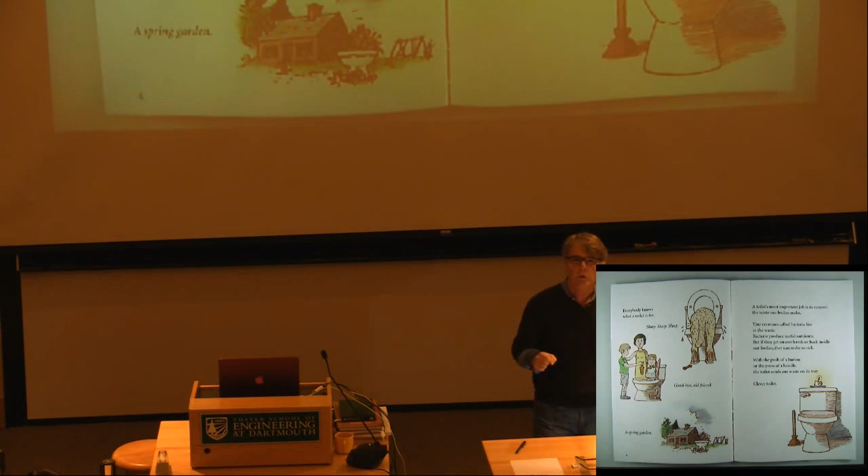It's an object so familiar that we completely take it for granted unless it stops working. And it's amazing how quickly we stop taking things for granted when they stop working. We're just used to it. We don't look at them. We don't see them. In the middle of the night, we hardly even touch them. But we know how to find it. We know how to use it. We know how to be done with it.

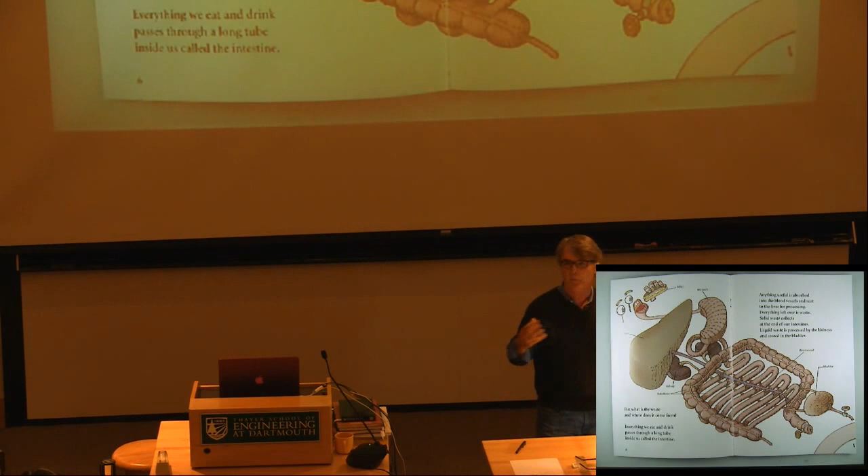Familiarity, in that sense, really does breed a kind of disdain for looking, for taking note of the things around us. We become so familiar, we stop asking questions. The best thing about drawing is it forces you to ask questions again about even the most familiar thing, which is why I mentioned the apple.

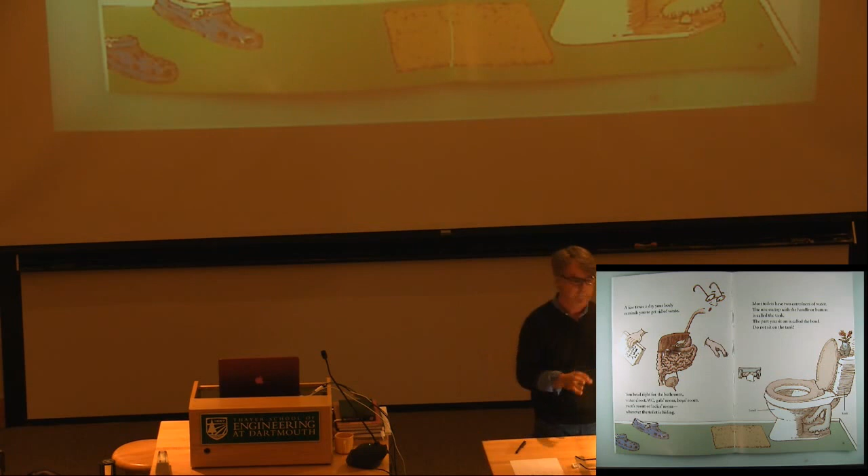So I take you through. I decided that I would introduce the toilet and the toilet system as part of a larger system that began with a human system with which it interconnects. Toilets are relatively useless without us. And there are those fundamental issues and problems like no paper that confront everyone. But those are the little clues that remind us, this is very familiar, this is my world. And into the tank.

Now, you may think for a 6-year-old or a 7-year-old kid who's not much of a reader, this is a little bit of a stretch. I hope it is. I hope it is a little bit of a stretch.

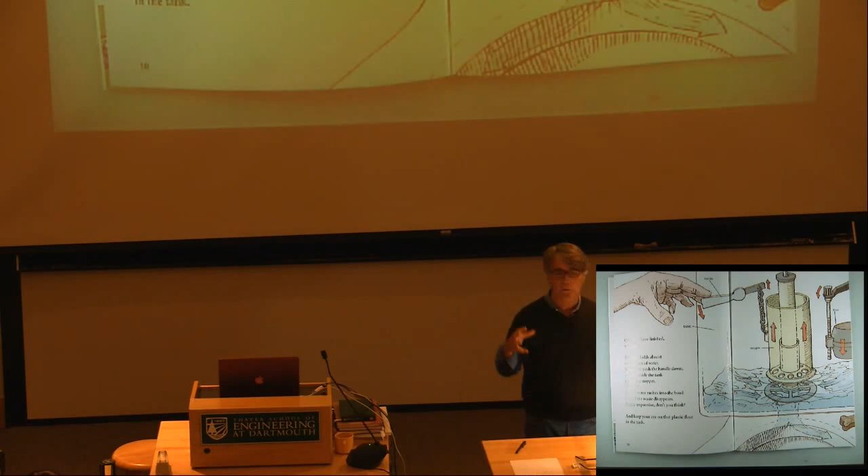So I'm scrambling around on my hands and knees around one of our toilets, trying to watch the flush action, see exactly how the water disappears, and where it's coming out in force and where it's just kind of leaking out. And so that's what this is all about.

I mean, a character is only a way of engaging the younger audience. The dog with the missing dog biscuit. A little bit of a...

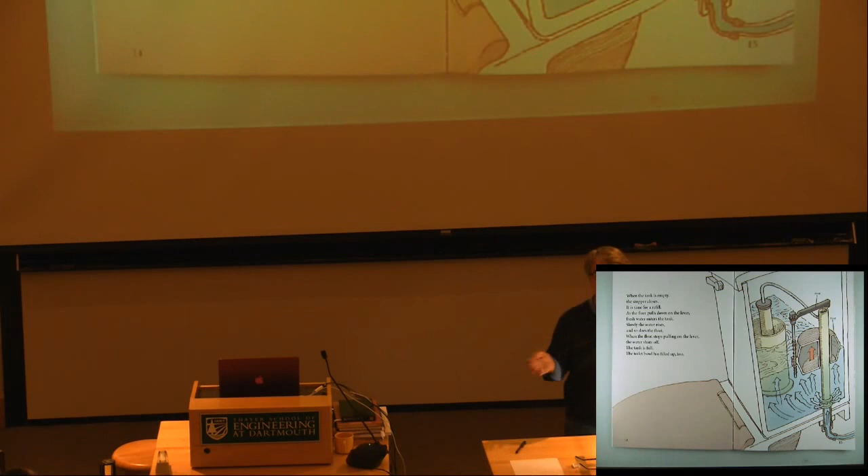Anyway, if you need to know, if you have problems with your toilet tank and you're not quite sure what to do with it, you probably can all figure it out. But if you weren't able to figure it out, you just get this little reader. Might be a little embarrassing at first, but get it and you will know exactly what's supposed to happen.

You will know what happens after the toilet with the septic system. If you happen to live in a place with a septic system, you will understand and have a little bit of appreciation for the biochemistry going on here, the bacteria at work, and their job is, of course, crucial to making this whole thing work. It's what gives us green grass.

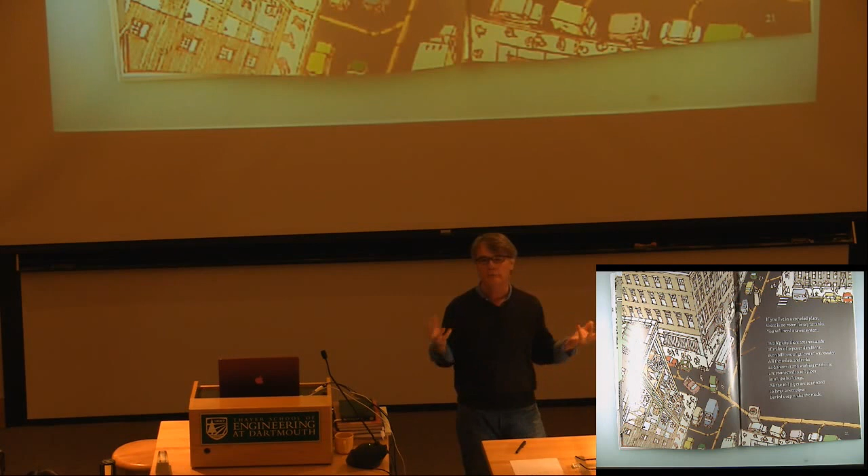If you live in a metropolis like Hanover, for instance, you might need a larger system. And I did spend a few days in August of 2 years ago now. It was hot as hell. It was like August afternoons at the waste treatment facility in Hanover.

I don't recommend it unless you absolutely have to, but it was terrific because they actually let me hang around, which was an odd request, I suppose, to begin with. But they let me hang around there with my sketch pad and so on.

And I finally figured out what all those different shaped tanks do. I mean, I've driven past waste treatment facilities for years. I've flown over them. But I never really understood what the round tanks, the square tanks, the covered tanks do.

So now, to help this young reader read, you can actually learn about aeration tanks and digesters. I mean, digesters, what a fantastic life for bacteria, to be flung against the walls endlessly in this stream of sewage. It's a spa for very tiny creatures, in a way. So anyway, that's what this is all about. That's how I introduce myself.

That's the latest. But now I will jump to a range of examples that I hope you will find useful.

I don't have a graduate degree. I just have this Encyclopedia of Science that I got when I was 10. And it's actually done reasonably well for me. It has information about everything I could ever want to know. At least that was the way it was sold.

Empire State Building. SS United States, fastest steamship in the world. Won the Blue Riband, and then it got beaten out by airplanes. And so it remains in Philadelphia, tied up to a dock. It is the subject, in part, of my latest effort, and I will take you through a little bit of that, but I want to really try to emphasize the decisions I made about the drawings I did, or am doing. Nothing's finished yet.

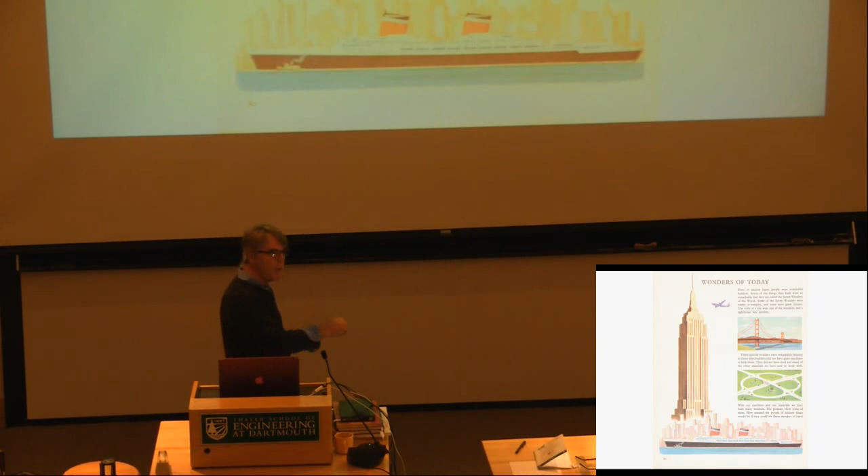I haven't made a single piece of finished art for this book, which is due in about 2.5 months. So I'm in big trouble, but I do know that at least the material is making sense to me, partly because of the drawing process.

And we were heading west to the Empire State Building. The only thing I knew about the United States when my mother said we were going to America was the Empire State Building and cowboys and Indians, but that didn't really count. The Empire State Building is the thing that got my imagination.

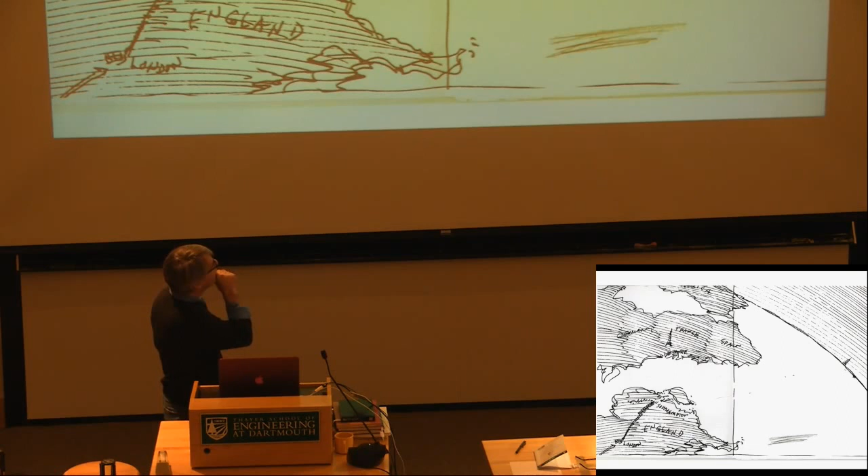So I did want to give you a sense of the relationship between the US and England, which is shown here upside down because I want you to move across the drawing from left to right, which is the logical way to move for many of us, not all of us, and end up in the West there.

Okay, so last night on the ship, this is a 4-day journey. The last night of this journey is something called gala night. They have this fancy menu with food things you can't pronounce, at least not if you're from Lancashire and you're 10. And so there we are, having the times of our lives.

We pull into New York, finally, after this. Now, I had no idea that this was such a fantastic ship, that it was really a work of art in terms of speed, carrying 2,000, more like 3,000 people, across the Atlantic at 34 knots or something like that, and then finally pulling up the Hudson into Dock 86, Pier 86.

And there's the Empire State Building to greet us. But wait a minute, I'm 10 years old. I know what the Empire State Building looks like. I know how big it is. It's this big. It's not this big. This is pathetic. What a disappointment.

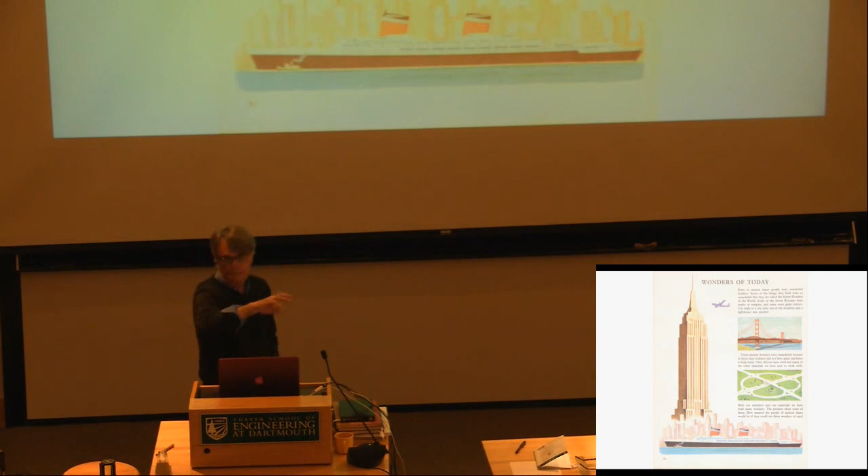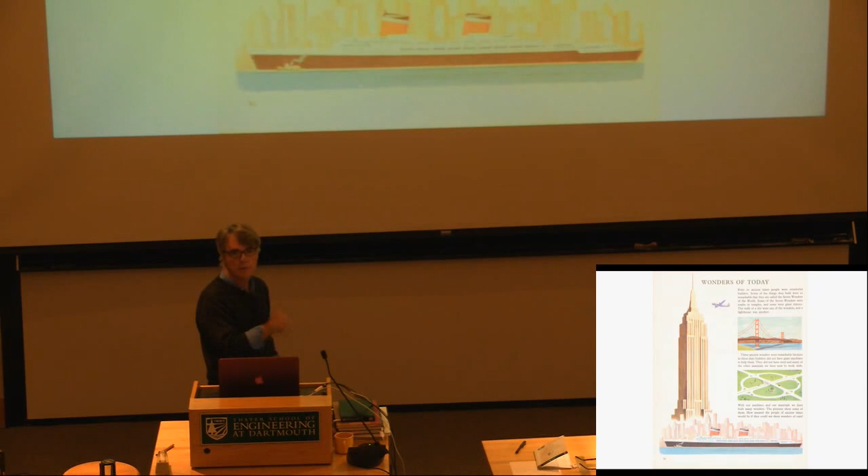It was the first time in my life I felt actually cheated. And the irony is, I was cheated by an illustrator. But he got away with it. On legal grounds, he was okay, because you'll notice that the building doesn't actually touch the skyline. It floats above it with a sort of foggy mist, which means he is off the hook for misleading young readers who pay attention to the illustrations, even if they don't actually read the words, which was me.

So what kind of information do I need to ultimately be able to tell my story? And it's what you would expect. It's plans, cross-sections, all this kind of stuff that basically means nothing to the average reader. And if I attempted to use this as the material to present this extraordinary creation, I wouldn't last long.

This is a bulkhead, a watertight bulkhead. This is basically one of 20 walls built from side to side, from the bottom of the ship up to about a deck, something like that, halfway up the height of the hull. Heavily reinforced. It's like an ice cube tray, except the containers actually really touch the bottom, and there's nothing seeping through on either side.

The whole point of this is, obviously, if you damage part of the hull, the area between two of these bulkheads might fill up with water to a certain height, but it will not destabilize the ship to the point where it starts to sink unevenly.

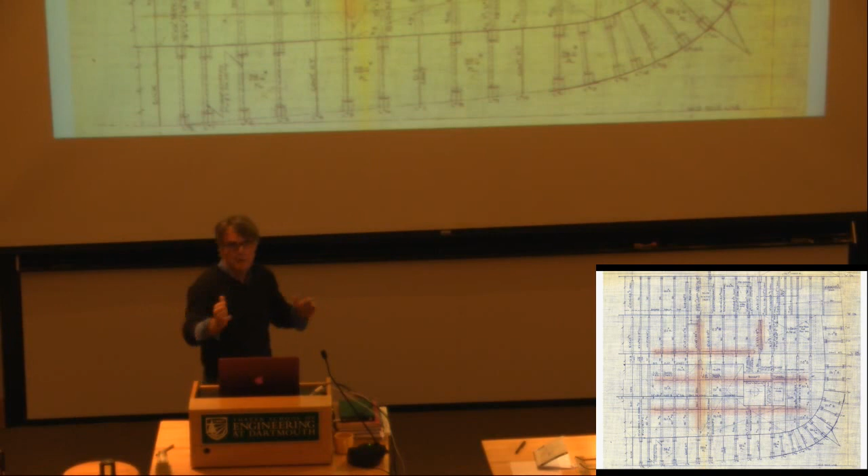So this is it. This is where it is these days, and you can see that it has actually seen better times. There's a group called the Conservancy for the United States that's trying to save the ship and come up with ways of repurposing it, not as a ship. It won't sail again. But it's hard to come up with ideas for something 1,000 feet long and 175 feet high that's meant to float in water, 100 feet wide due to the limitations of the Panama Canal.

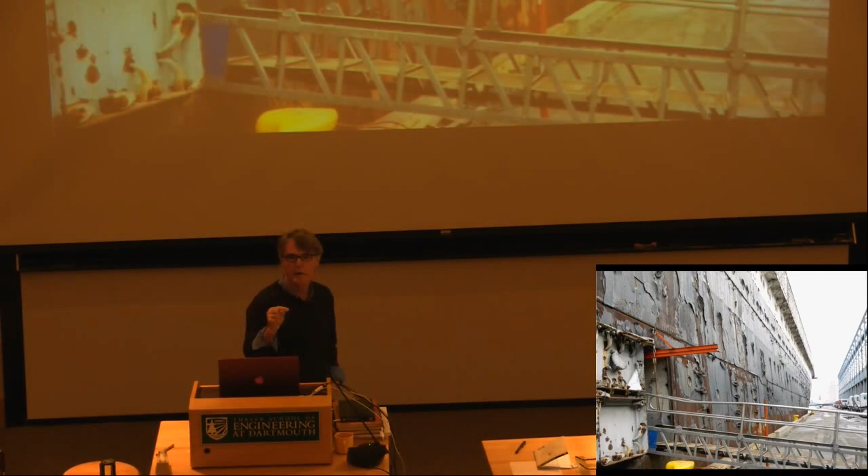That was a requirement pushed on the creation of the ship in the beginning, because it was designed not only as a passenger liner, but just in case as a troop carrier across the Pacific, which is where the trouble seemed to be brewing.

Anyway, just a couple of images from the 2 or 3 trips I've made now to the ship. Up the radar mast, the whole upper section from the main deck, the promenade deck, where the hull stops, basically.

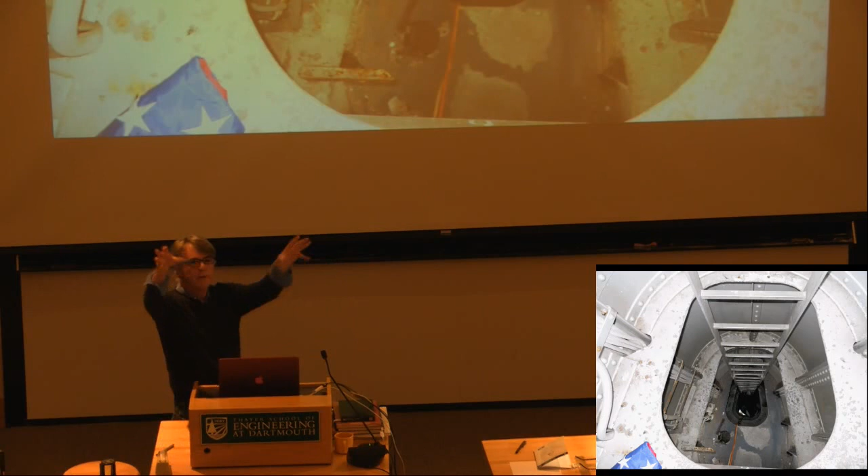Everything above that is built of aluminum, so it has a relatively small weight. It doesn't have much strength compared to the steel hull, but it significantly changes the way this ship works in the water. That's something I need to get across. This is the surface of the deck now - that's rust. This is the funnel.

This is inside one of those two funnels, and you can see it's just basically this vast sculptural form, a very small portion of which the uptakes from the boiler rooms pass through to get rid of their soot and stuff like that. This is a little hard to read, this little drawing up there at the moment, but this is more or less what it looks like inside.

It's pitch black - there were no lights at the moment, no electricity in the ship. So what made it tricky was trying to find your way around. What I found was the digital camera, in my case, was fantastic because it would illuminate the whole space for a split second, and only when you got away from the ship and had a chance to really look at these images did you know what you'd seen.

The idea of drawing those photographs is really important for me, and I'll give you some examples of that. Photographs record a lot of stuff, but they don't actually help you see it. Unfortunately, what is often the case is I get back to the studio with these photographs, and I have so many questions about what's in the photographs that I can't answer. I'm not going back there.

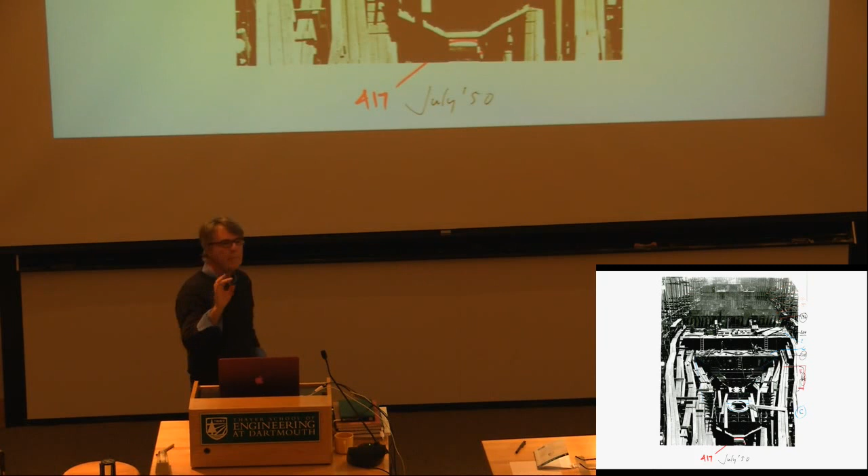So drawing from photographs is really key, and figuring out how to do it - I don't just mean copying the photograph, I mean interrogating the photograph, and finding other information that can help you answer those questions as you start to draw it. The thing is, you won't ask the questions unless you begin to really investigate the photograph, and one great way of doing that is through drawing.

These are photographs taken at the time, 1950-51, of the construction of the ship, and these are often, with the perspective and the distortion, really difficult to read. But I'm trying to get a sense of the depth here and all that sort of stuff.

One of the things that I will do with a photograph like this is draw it, but from a different angle - turn the whole thing slightly, so I have to draw it from the side. As soon as I change the point of view in making a drawing, I can approach the subject matter in a different way because I start asking questions about what is there, what's behind that, what is that tube connected to. No one angle is going to give me all that information, but the act of drawing it, of transferring it, through this process of inquisition, will encourage me to fill in the missing pieces.

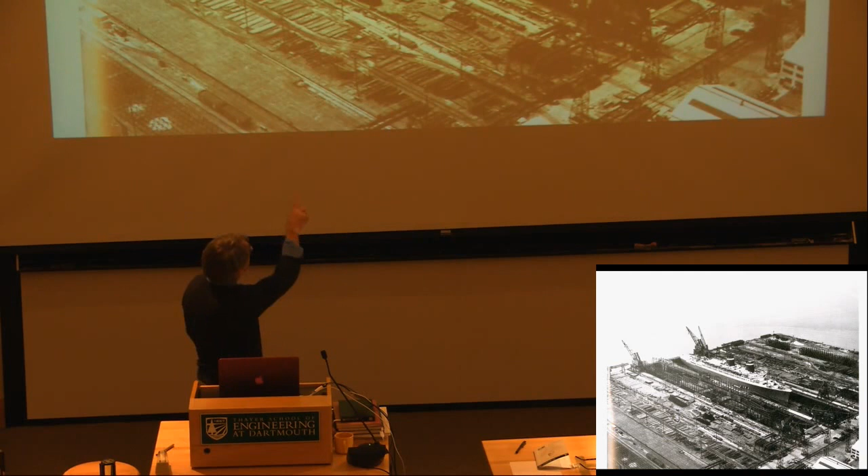There is the sister ship, the America. This big thing in the foreground, that's the dry dock in which the SS United States is being built, and it will fill the dry dock something like this.

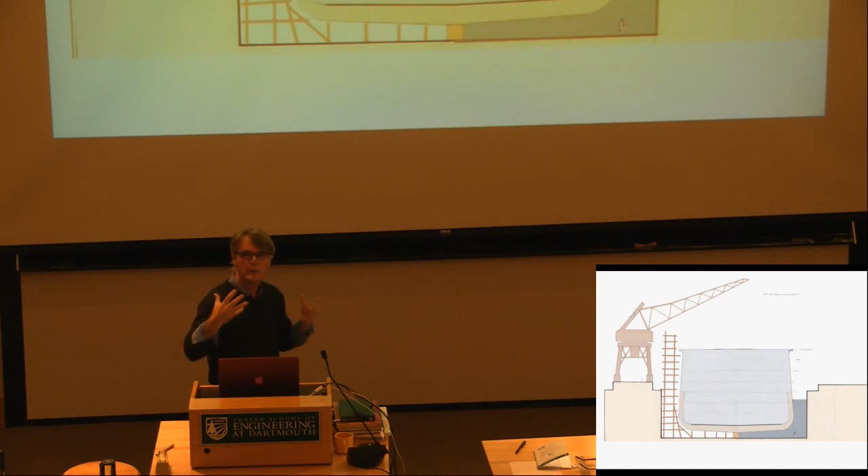I mean, it doesn't look like a particularly handsome form, but when you see this thing in three dimensions and realize how the curves have been perfected, you realize why it could travel at the speed it could, given the weight reduction thanks to the aluminum and the incredibly powerful engines that ran this thing - basically destroyer-powered, battleship-powered engines meant to go fast.

The story begins, in a way, in 1894, when we get to the end of an evolution of steamships. William Francis Gibbs, who designed the SS United States, commits himself after watching the SS St. Louis launched. He's a big fan of Brunel - who isn't? Who in engineering is not a big fan of Brunel? I mean, an extraordinary guy who - I think one of the things I admire most about Brunel is that he was always willing to learn from somebody else.

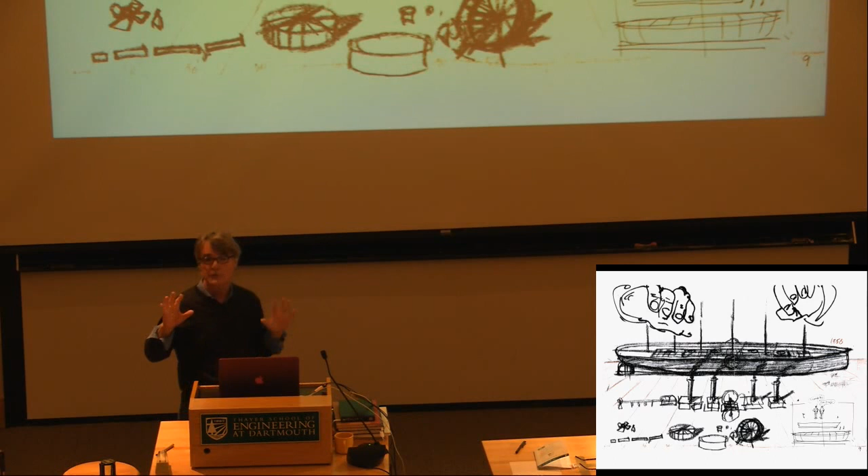Gibbs's ship, which he designs when he's about 22, 23, is going to be, in his mind, the fastest, longest ship in the world. This is his dream. It's made possible in part because of work done in the early 19th century to improve steam engines, which go back to 1700.

Here's a little drawing, a set of sketches, basically. They're not pretty, but there's a thinking process I hope you recognize, jumping from one thing to another. In the upper left-hand corner you have the old steam engine, the kind of thing used to work a pump to drain water from mines. You've got a chimney from the boiler, from the furnace, the boiler in purple on top of the furnace, and the piston on the right-hand side, which is going to pull a lever that works a pump and drains the mine.

Well, you can try to put something like that on wheels if you have this idea for something a little more mobile. This is not a steam engine that's meant to go anywhere—it's three stories tall. But the arrangement of those very pieces, the reduction of the things that provide the work necessary to operate something, is unchanged. I simply bent the chimney into that U-shaped fold, ran it through a boiler of water. So there's a firebox in there creating heat, and that heat is moved through that big folded chimney and out the top. Now you've got something small enough to stick on wheels.

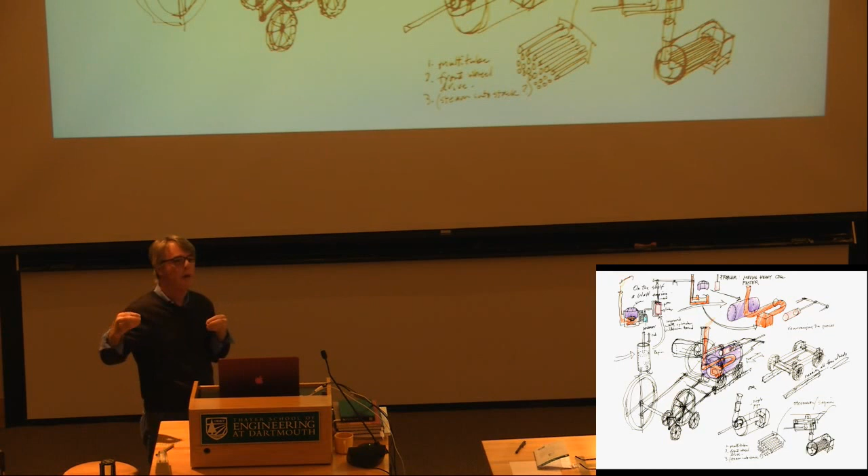Eventually you take out that U-shaped thing leading to the chimney and replace it with lots of small pipes, so a much larger surface area is formed between the heat traveling inside the pipes and the water around them. So you get a much more efficient use of your fuel.

So once you've got pistons working with steam, you can connect them with cranks to a drive shaft, which will lead to a propeller, or one that crosses the ship leading to two paddle wheels if you're still using paddle wheels.

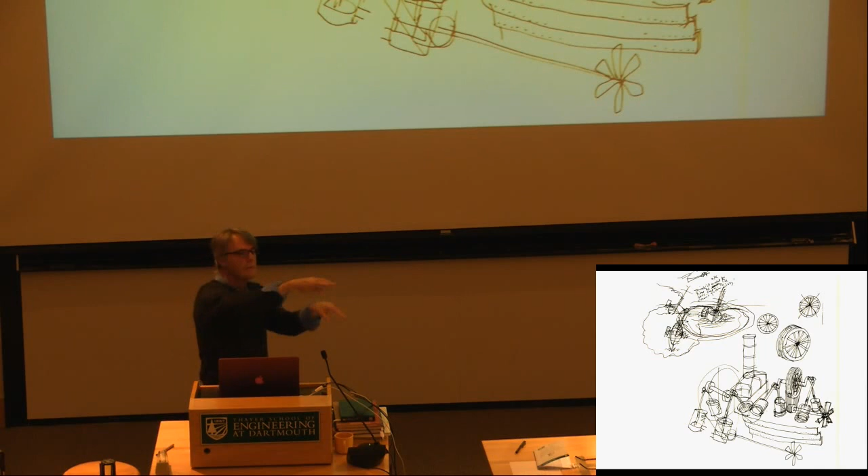The problem with paddle wheels, of course, is that as the ship moves through the sea, it's not necessarily moving steadily or in a horizontal way. The paddle wheels tend to lift out as the ship rocks, so you're not getting a very even distribution.

Now, Gibbs, like Brunel, learned from other people, and he had a chance to work on this enormous German ship that was seized during World War I, used as a troop ship, and then after the war was converted back into a luxury liner—but now an American luxury liner, as opposed to the German luxury liner it had begun its life as.

He's got 30 years of learning from all these extraordinary opportunities, but his dream remains to build the fastest, longest steamship in the world. He works for the Navy, he and his brother, and they're responsible for overseeing and creating something like 70% of the Navy, of naval and merchant vessels, during the war. So they become very successful.

William Francis Gibbs becomes the preeminent American naval architect who never studied it—he actually went to Columbia to learn real estate law. You may not see the relationship between those things; I certainly don't. But he did it because he promised his father. He said, 'I'll do it for a year,' hated it, and went back to designing his big ship. He had the extraordinary success of being able to take advantage of every opportunity that came his way.

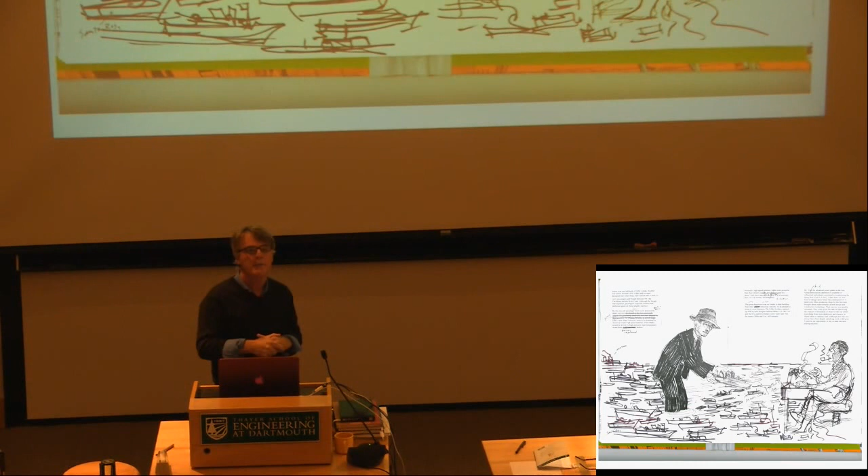What kind of a drawing do you make to suggest this? Well, I don't know whether he's looking into a tank filled with all his creations, as if it were this extraordinary bathtub experience, or whether it's a test tank in which the hulls were literally tested to improve their workings. His brother Frederick was primarily concerned with the adding machine, keeping track of expenses.

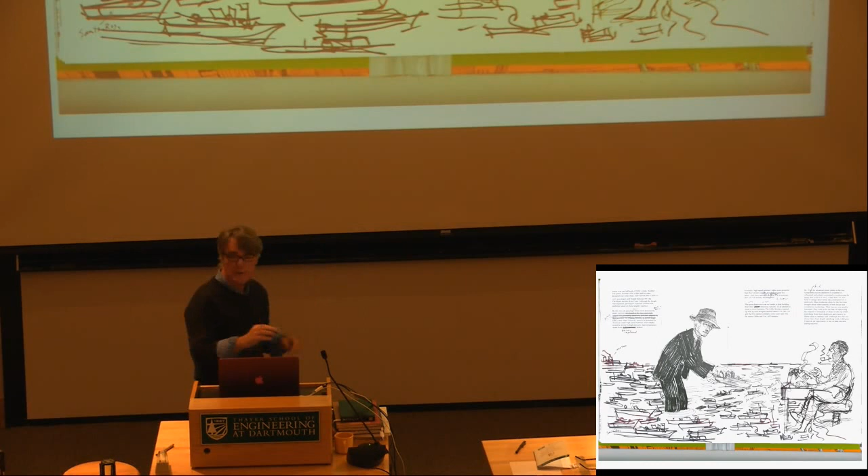And the money that came in was obviously considerable. He is very successful even then, when the Normandie comes into New York. This is a page of sketches meant to get across the idea of this fantastic, streamlined, spectacular ship, which also won the Blue Riband for a couple of years, and had huge, gigantic public spaces—like the biggest hotels and so on—but on board this ship.

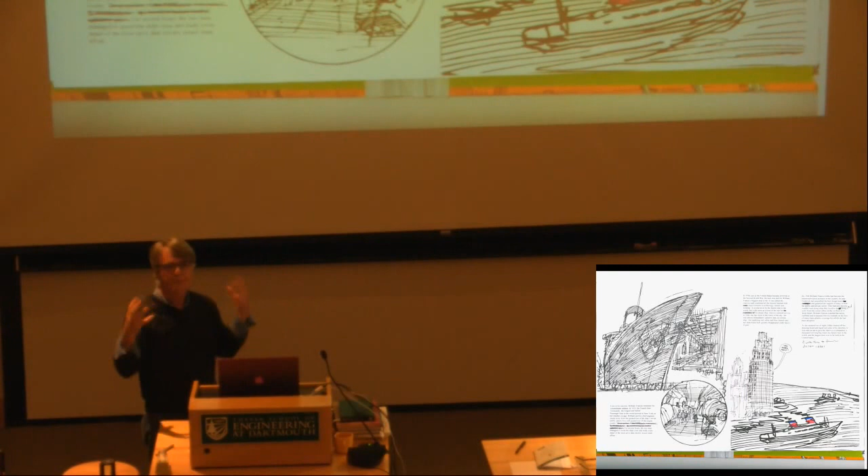So it was that kind of experience. Meanwhile, he and his cohort, another engineer from the firm, snuck down into the engine room, which was all electric motors that made the Normandie a unique ship.

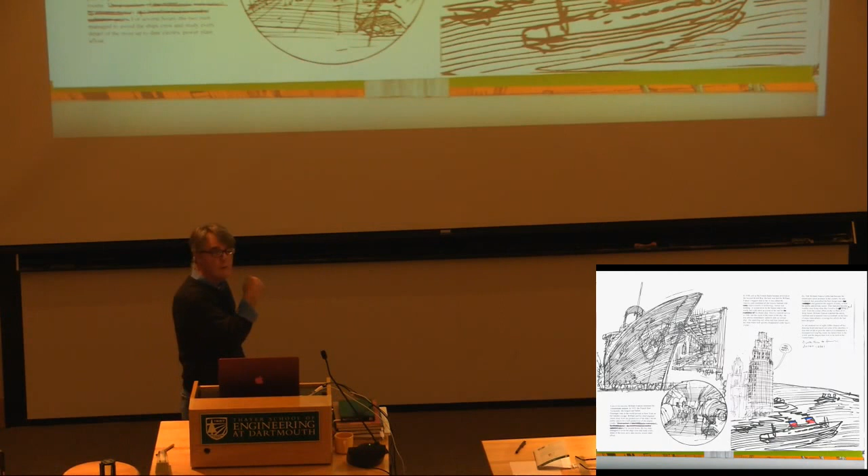I'm playing with possibilities. This is the Queen Mary. I'm not sure what ships to show here yet, but I plunk these things down. The sketches are rough. They're recognizable because I've drawn them enough times.

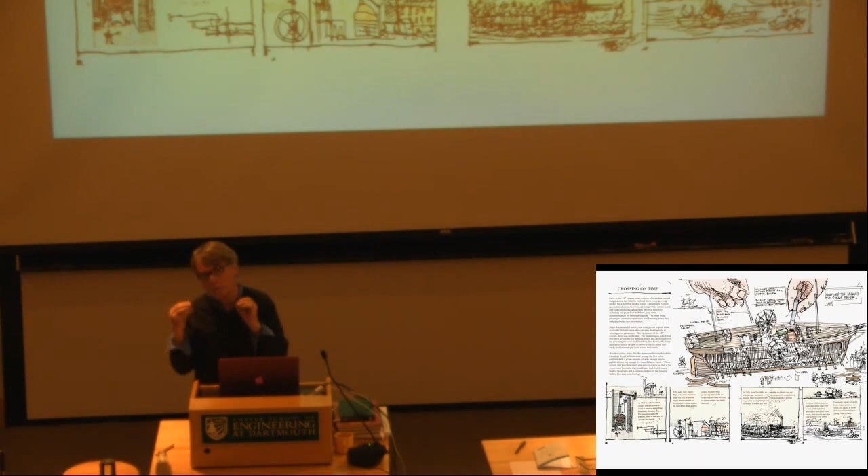The one thing you will find about drawing that I find useful personally is eventually you no longer need the subject matter in front of you. You don't need references. You draw things so often that you can continue to draw without any backup. That's when you really start to think about the elements. You're not being distracted by the look of something. You're being concerned more with what it does and what it does in relation to other things. In this case, it's just shapes related to shapes and so on.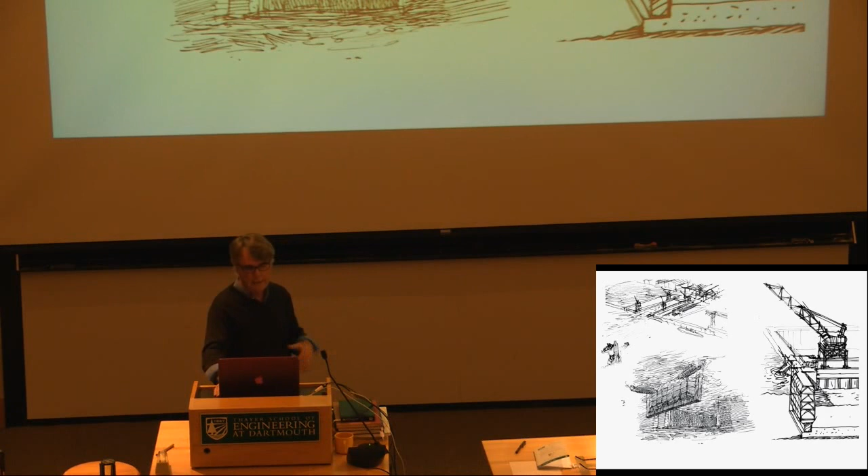The first thing you need to do if you're going to build a United States is get a dry dock ready, which means you have to empty it. You're basically floating this big wall over to the front of this bathtub, which only has three sides. You push the wall into place, fill it with water so that it drops, and seals the end of the bathtub, especially when you take the water out. When you suck it dry, the river water on the outside of the wall is pushing it against the end of the bathtub, which creates a really tight seal. So you end up with this space, which then you can lay the scaffolding in.

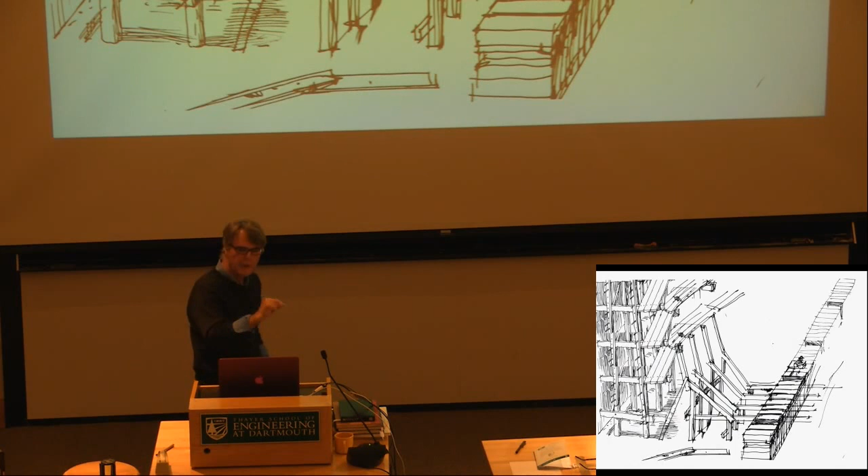Again, these are rough sketches. They've been drawn many, many times. I don't know whether any of these will make it into the finished book, but one of my favorite photographs is this one.

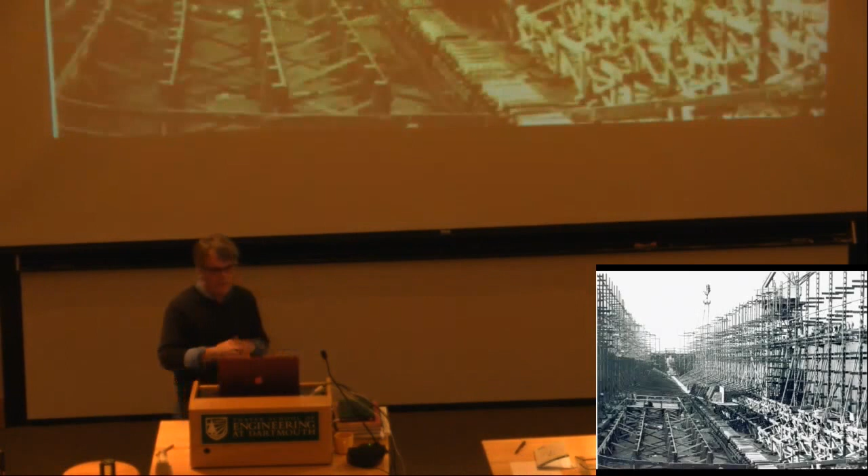Gibbs was paranoid about fire in his ships, so no wood. He tried to convince Steinway to build aluminum pianos for the ballroom and the first-class dining room and so forth. Steinway refused, but what he did do was fireproof the wood and then set a piano on fire to demonstrate for Gibbs that it wasn't going to go up in flames and create a serious problem.

The irony is, everything around the ship during its construction is made of wood, with the exception of the cranes. That incredible scaffolding, the cradles that support the hull as it's being constructed, the block down the center that supports the keel. The keel itself begins as this sub-assembly.

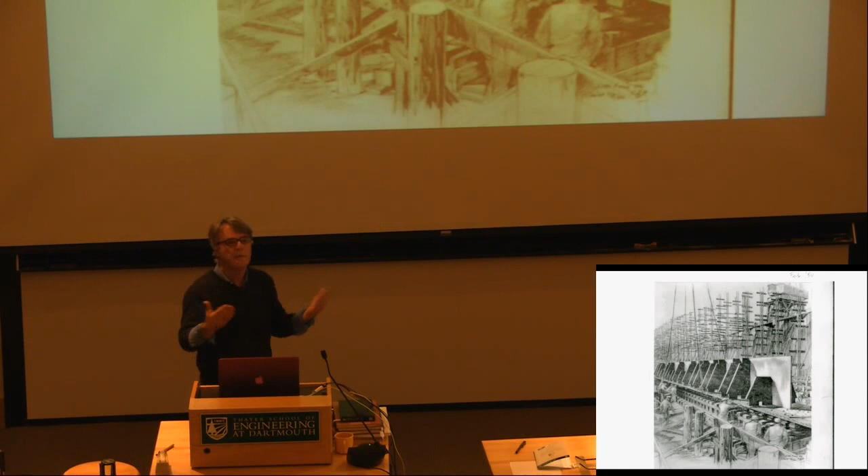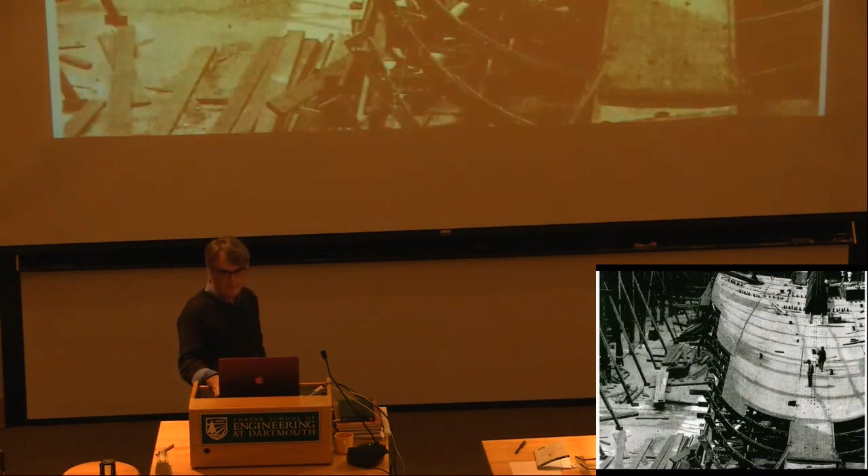The other thing about the ship is that it was produced basically in lots and lots of pre-assembled pieces, so it could be put together fairly quickly. It's ironic to think of this beautifully streamlined form being made primarily out of flat pieces of steel, maybe an inch thick, maybe a little more, a little less. Just cut into shapes and stuck together as you might make a model with a glue gun and foam core. The shapes you can create are really quite beautiful, but the structure inside it is very basic. Outer hull at the base.

And so now, choosing points of view. When you make a drawing and you're trying to explain something to someone else, I'm synthesizing the information I hope I have learned by creating the double hull shape, the big U shape, so we have an inner shell and an outer shell. I'm also trying to figure out how to get you involved in this, how to make you part of the process, how to let you be a worker for a few pages, as if you were there with your welding torch or your riveting equipment. Both were being used. Watching this thing grow around you, it's the point of view, the use of perspective. These are all important things.

Sometimes you need to get away and use something perhaps a little more conventional and, frankly, less interesting - a more isometric view, as you see here. But these, you begin to see now the bulkheads, these parallel walls. They're about 40 feet apart, running from one end to the other. And this is the biggest safety feature.

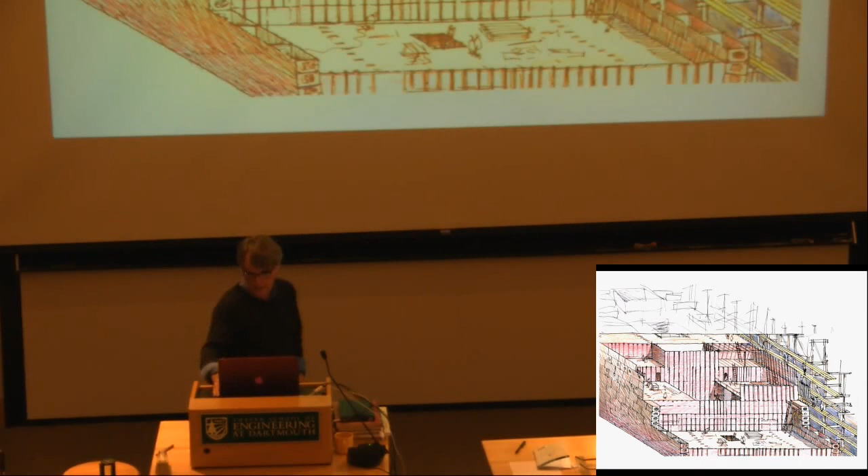First class passengers never had to go through a doorway in the bulkhead, which means wherever their decks and cabins started, the bulkheads ended. But they were far enough up and away from the water that it wouldn't have been a serious problem unless something really catastrophic happened. We were not first-class passengers, just in case you're wondering.

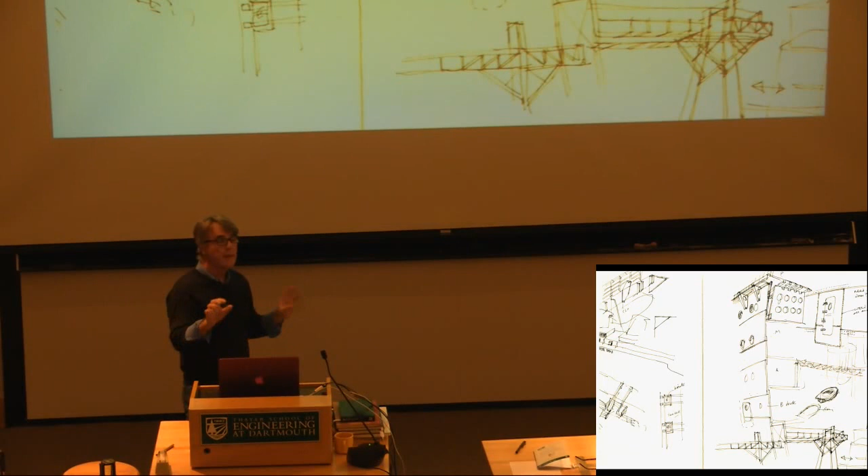Planks, the planking on the exterior of the ship, these are planks that are sort of 8 feet high, 12 to 20 feet long, an inch thick steel. In the center of the ship they are riveted, and as you get towards the end of the ship they're welded, so the surface becomes smoother and can cut through the water with a little less resistance.

The back of the ship, this is like trying to understand one of these photographs where the perspective is a little disconcerting, tricky to figure out. That's the keel at the bottom beginning to rise up now towards the rudder. You've got those tunnels on the sides that will carry the propeller shafts. The two outer ones carry those shafts 400 feet from the main engine room. You get this extraordinarily beautiful sculptural projection on the side of the hull at the back.

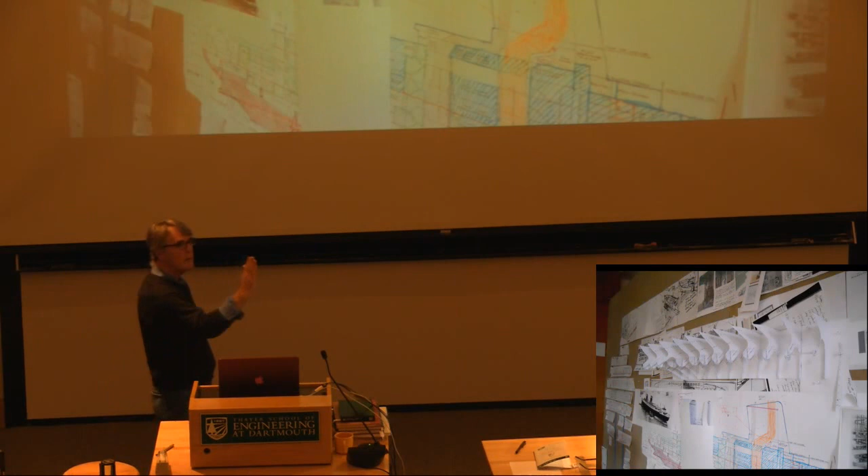This is how it's conveyed in official language, which is almost incomprehensible to any but the engineers and builders working on the project. So what I did was take this plan, print it in black and white, cut each of those silhouettes out, and then stick them together on a cross-section of the hull at the back. You begin to see in model form how you translate from a drawing.

I think building models is really important. Even the most basic, simple, taped together little things can really help you bridge that gap from two-dimensional exploration, that questioning exercise, into something three-dimensional. Again, it's not about being pretty. You can only go so far in your drawing in understanding what's actually going on three-dimensionally. At some point you need to mess with the real thing, and the more quickly you can make that leap from drawing to three-dimensional model, the better.

You're building this body of information, and these two means of exploring the problem help you figure out whether or not you're asking the right questions. So whichever of those things you find most useful, you go for it. This is what it looks like, and the actual finished thing looks like this.

Now, there are a number of videos available of aspects of the ship under construction, and you see something like this, which might be a little hard, impossible actually, not hard, for you to read. This one's equally difficult, but this is the end, the stern tube. This is the last piece of those 4 shafts that come out where you break through the hull in order to have propellers.

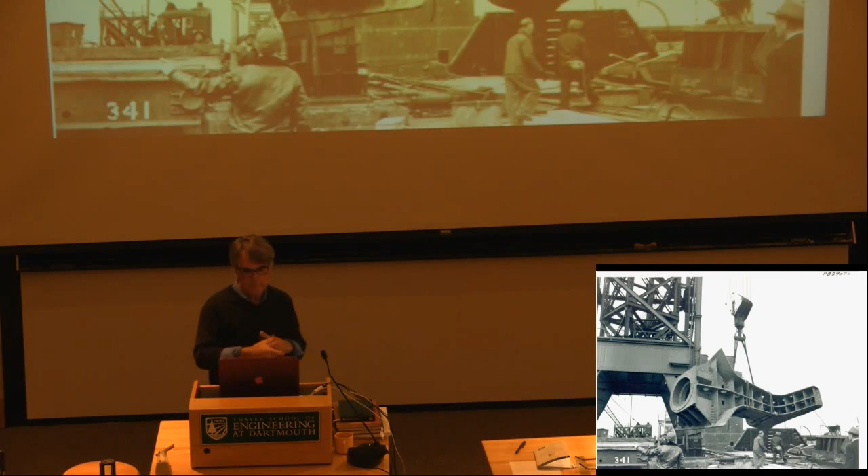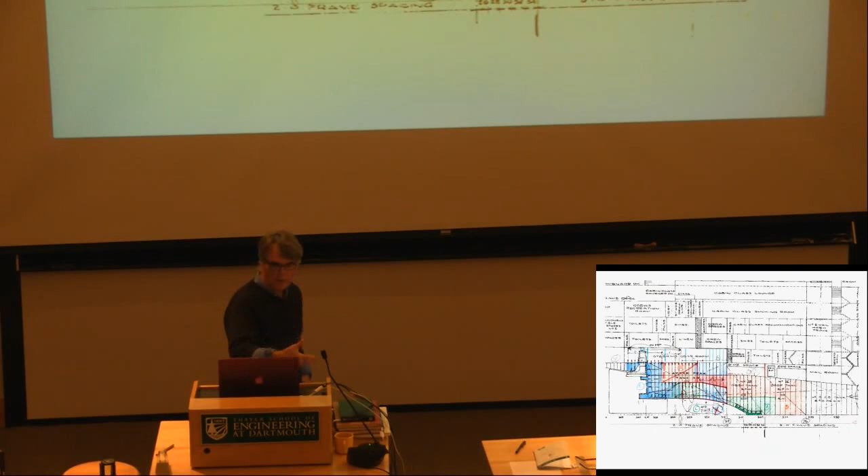Here's a big casting, welded together in a number of pieces. I'm sure nobody's going to cast anything quite like this, but this is the piece that sits at the end of the keel, and it supports the weight of the rudder, basically. You can see in cross-section, that dark blue area is that cast piece I just showed you.

In this photograph, we go back, and you can see the rudder in place now. You can see the relationship between... you can see how complicated the back of this hull is, but it has to be. This is the part that's doing the work. The other end is what's pushing through the water.

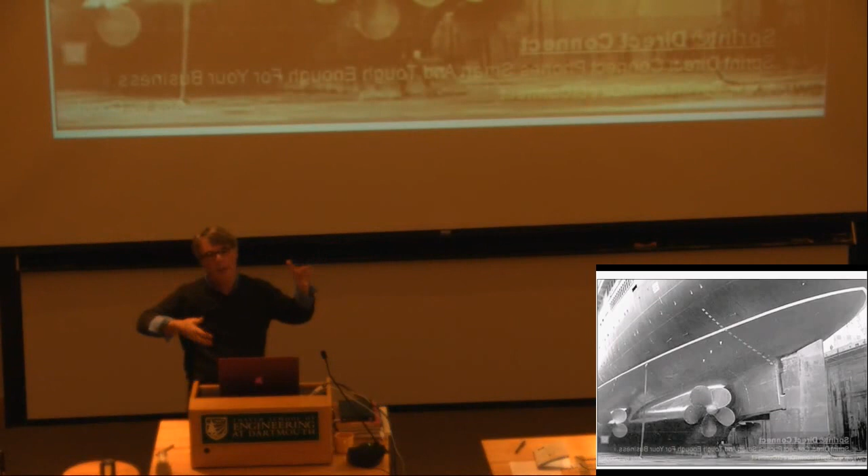Now, I said they built this thing in a dry dock. They almost built it in a dry dock. The dry dock was, I don't know, maybe 40 feet too short for the ship. But fortunately, where the ship projects, both at the bow and the stern, it was high enough up that it could stick out over the ends of the bathtub.

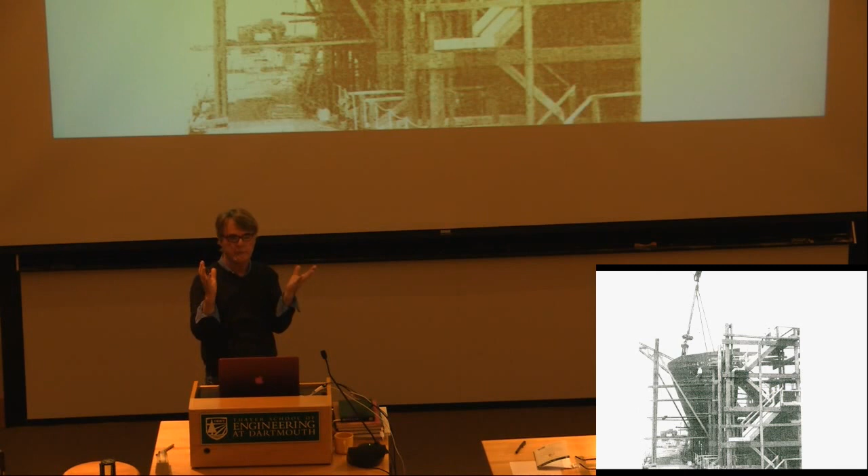So this is an entirely pre-assembled stern shape. This is the last piece of the ship at the stern end to be put into place. It was built next to the ship and then lifted into place. At some point you have to start getting the equipment downstairs, and you want to do that before you've covered much of the area with decking.

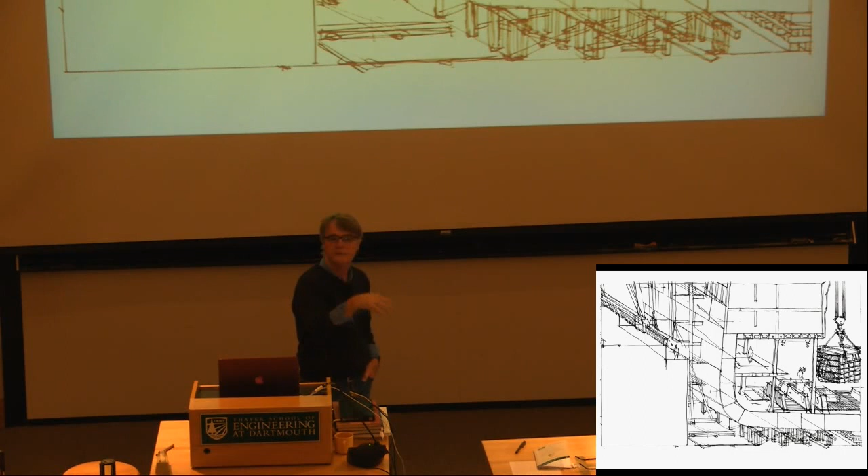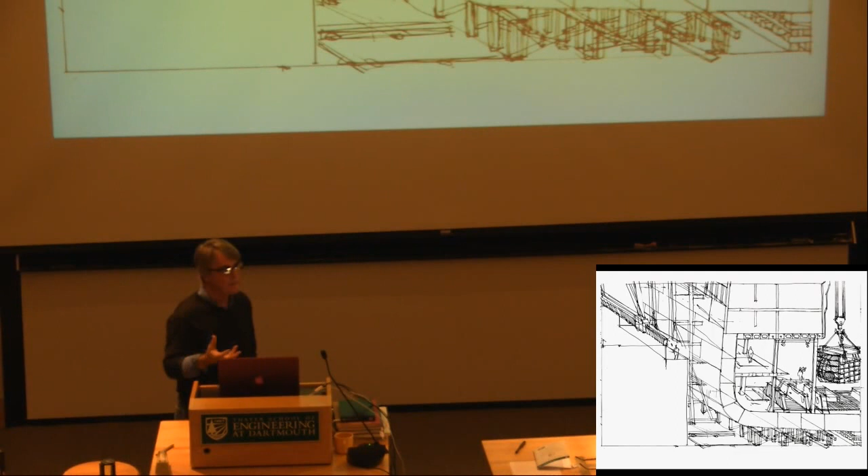And I need to find a way of suggesting that process just to remind you that you could end up with one of those horrible experiences where you design something for a place and you only realize after the fact that it's 3 feet too large or something, and you can't get it in or out. That's tricky with boilers and turbines and reduction gear assemblies, because those things are heavy.

Here are 2 of the boilers. There are 8 altogether, 4 for the outer set of propellers and 4 for the inner set of propellers.

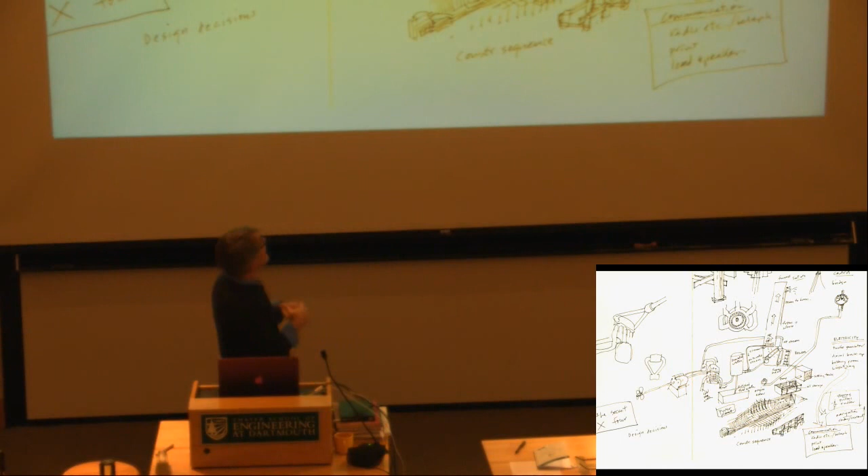Now, the system. This is another reason why drawing is so helpful and can happen quickly. You can't really tell what's going on, so I threw some color in. You can see the boiler in the center, that orangey thing. It's not about making a boiler that looks like a boiler.

It's about locating an activity and connecting it to, in this case, the high-pressure turbine, which jumps to the low-pressure turbine, which goes to the reduction gears, which turns the shaft eventually at the right speed. If the shaft turns too quickly, the propeller turns too quickly, you're just going to bubble up the water and not go anywhere.

And then you've got oil coming in, and you've got the whole water system, the condenser that takes the used steam from the low-pressure turbine, turns it back into water, feeds it back to the deaeration tank where it meets more water, and goes back into the boiler and begins the whole process again. So you've got all these overlapping systems.

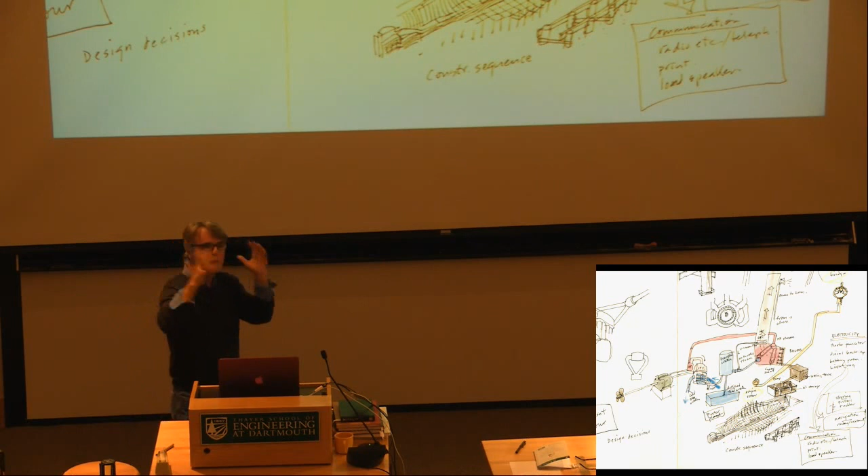Part of the reason for a drawing like this, although it's not been carried to its fullest extent, is that I get to see what those systems are, so that when I start drawing the ship in different ways, I have a clearer sense of what's important. That yellow thing is basically just to hint at, symbolize the connection between the bridge in the upper right-hand corner and the engine room.

Similar equipment. So the same thing happens on the bridge. If something happens on the bridge, it also happens in the boiler room. The guys know what to do.

The boiler room looked like this in 1950, '52. It looks like this now. It was pitch black when I was in there. This is the camera, this is the flash of the camera. Suddenly, this whole room comes alive.

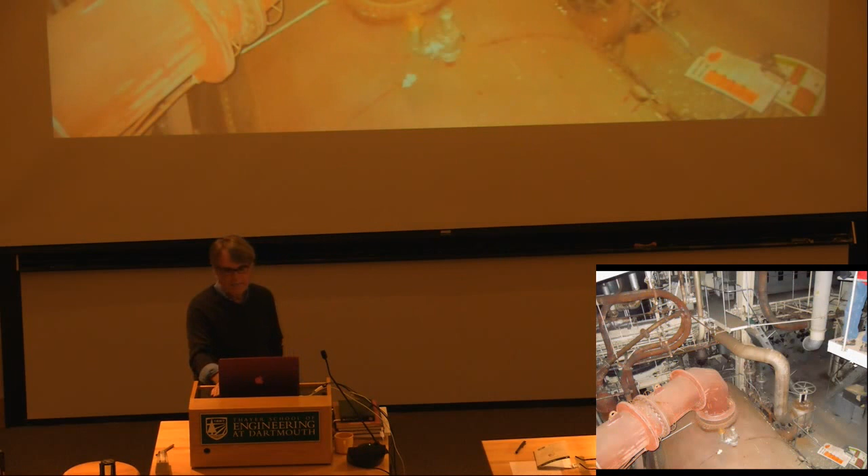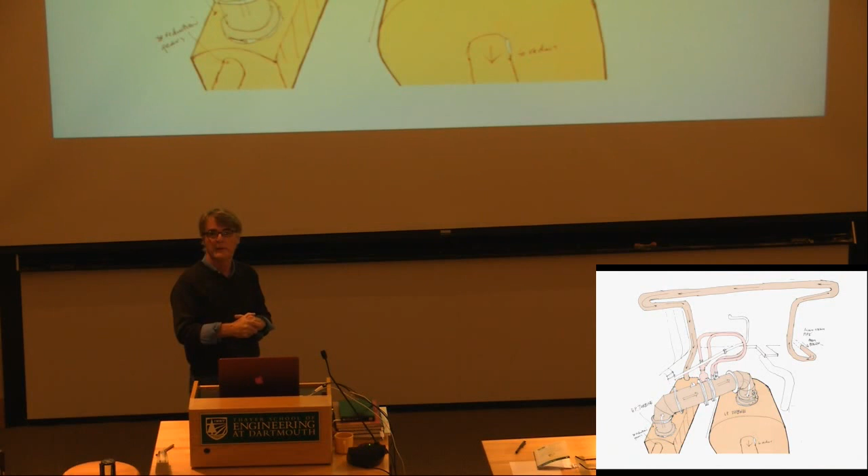I'm not averse to, since this is so complicated with all its pipes and things, using the drawing process here in a very fundamental way, tracing the photograph and editing it. That's another thing that you'll do with drawing.

When you start making drawings of things, you're really becoming an editor of information. You don't have to draw it all. You have to draw what matters. You decide what matters. That comes from asking questions about the thing you're confronting.

That's just turbine to reduction gear. Seeing what the layout of this all is, at some point, back to an isometric perhaps. I don't think I would use an isometric like this in the book, but it really helps me to get a sense of the spatial relationship.

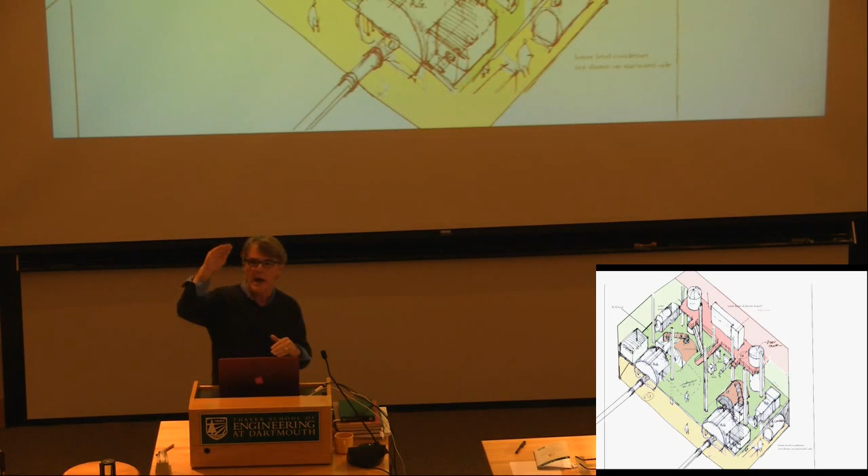Now, this is like 10 steps further along from what I would think that mostly you guys would use drawings for. The thinking process hasn't stopped, but now it's becoming encumbered by other things. I have to know that this will fit in this 100-foot wide space, 50 feet deep, whatever it is, and 3 decks high. So this is exactly what you don't do.

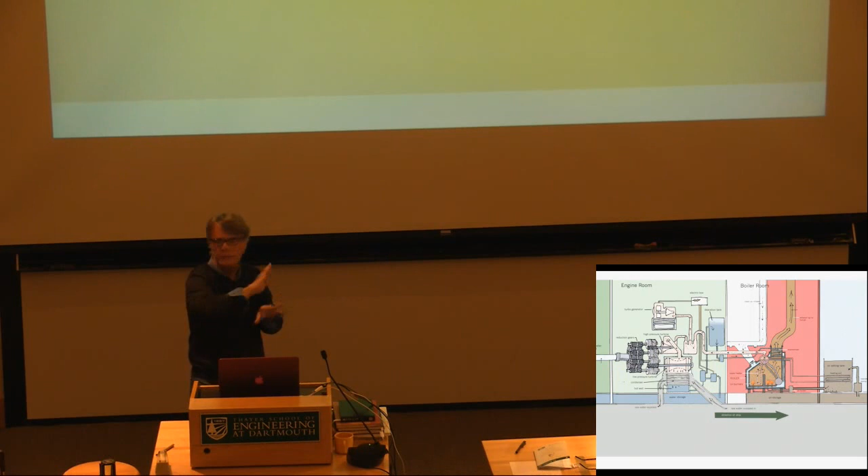But this is what I would do, again, to get the sort of scale of things down and to get the system down, just a cross-section right through the entire power plant, basically from oil all the way to propeller shaft. This is how I would much rather work, because although it's a little messy, still messy, you can follow, if you're careful, the traveling steam from the steam pipe in the boiler to the turbines.

You can see the condenser underneath it. You can see how the water... This is my favorite part of this whole thing. This tube actually comes from the condenser right through the hull, facing forward, so that as the ship moves forward, water is forced up that pipe, seawater, goes through all the small pipes, which I showed you earlier, except they were carrying hot gas. This is carrying cold water to condense the steam that's falling around it. And then it gets dumped out back into the ocean. But it's just so wonderfully pragmatic.

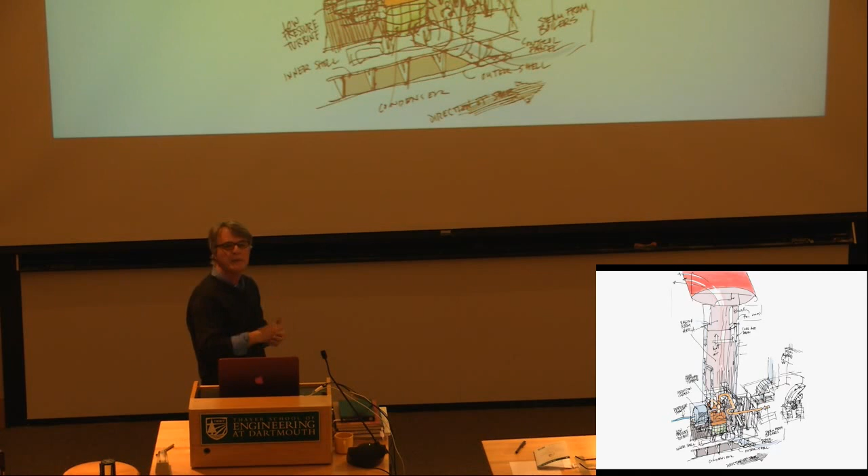It's like they made it up during a trip because they were having problems condensing enough steam. I mean, it's beautifully simple. But most of this has a kind of simplicity to it and an elegance that makes it all accessible. There's nothing here so complicated that it falls into the realm of the abstract.

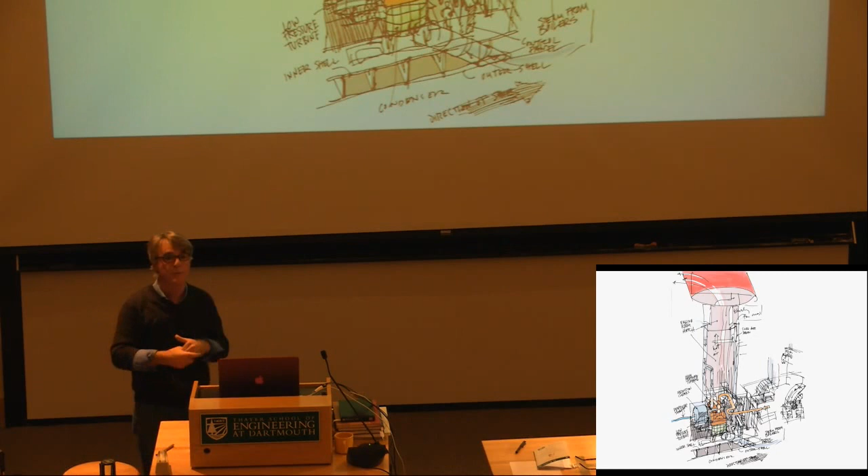No computers were used in designing the ship. Radar, yes, but even that is just bouncing electromagnetic waves off something and recording the time necessary for it to come back, figuring out how far you are from something you want to avoid. The propeller shafts—what's indicated in this photograph is what I showed you from the outside, the shape of that thing projecting from the side of the hull through which the propeller shaft goes.

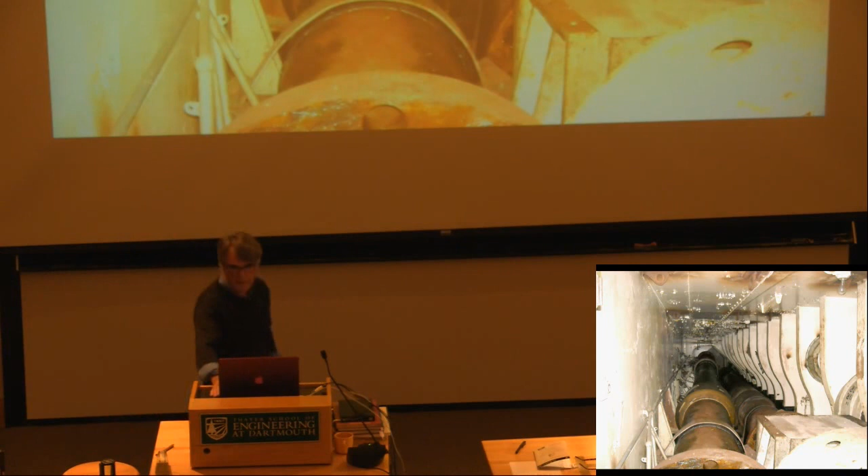Now you can see it from the inside beginning to bulge out. It's this growth that slowly bursts out the end of this thing to support one of these. Now, these propellers are at the Mariners Museum in Virginia. I don't recommend a trip there unless you have other reasons to be down there, but it is terrific to see this thing. And those are like Phillips head screws. It makes me wonder—the guy with the screwdriver must have been enormous, because those things are pretty impressive, these beautiful bronze sculptural things.

Now the front—how long have I been working on this book? The bow of this ship is assembled in pieces. And there are two things about the bow that are really important. The first, of course, is its overall shape, so it can move through the water in the most efficient way possible. Secondly, its strength, because this may be the thing that hits something first.

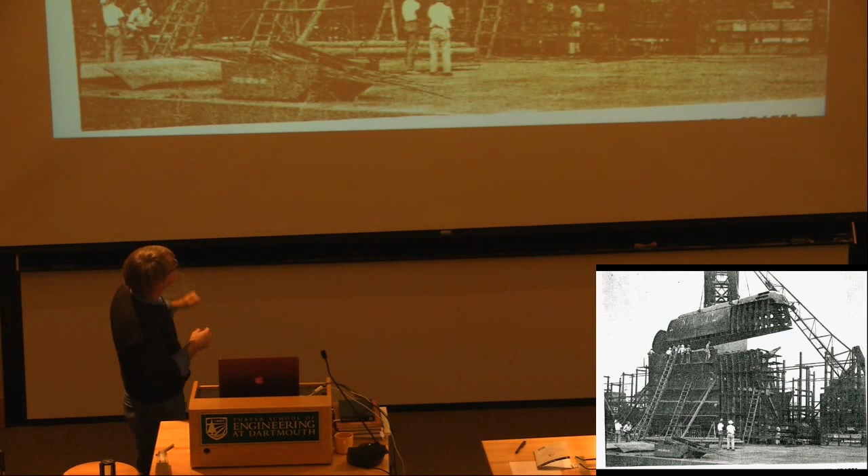So there's a need to pre-assemble these parts. There are some photographs available, and I've worked with these. That thing is going to get welded on top, that piece, and then the whole thing will be covered in steel plate. You can see it's already in steel plate on the left and top left. Then they cut it in half because it's too big a thing to move.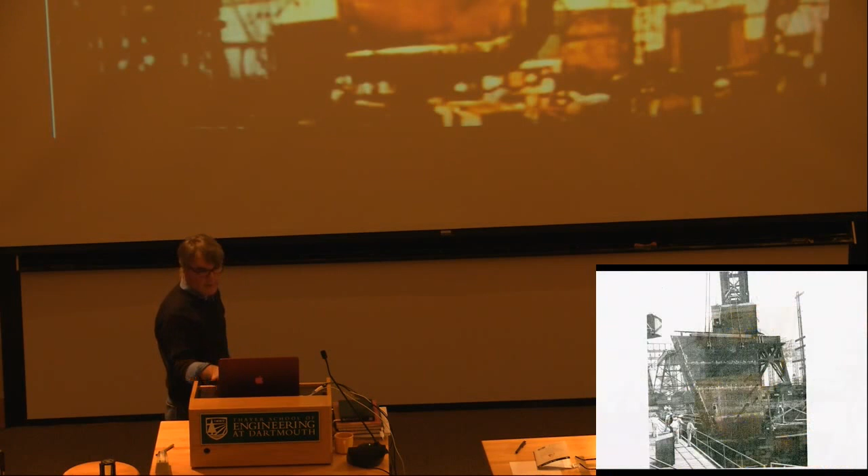And then they turn half of it upside down because it was built upside down. It's easier to work with molten steel if it's not dripping on your head, so they have a tendency to build things upside down—it's safer. But this is one half of that thing I just showed you, now being lowered into the dry dock, and it becomes the beginning of the whole bow structure.

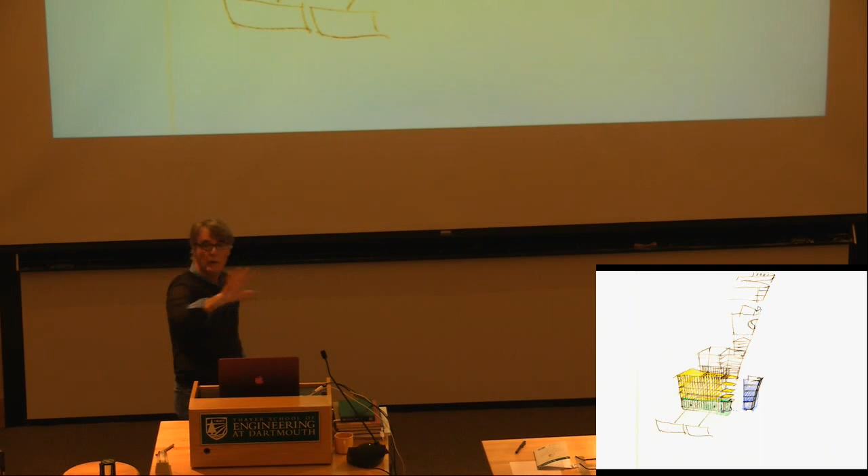And then you can start to pile things on top of it. That's sort of what it looks like in this little transparent view here. I mean, that's more or less where it is, but the scale is completely wacky—that's too big. It's a smaller part of it, but it's a key part of it. Anyway, it took me a long time to figure out, comparing photographs and cross-sections, where things actually were.

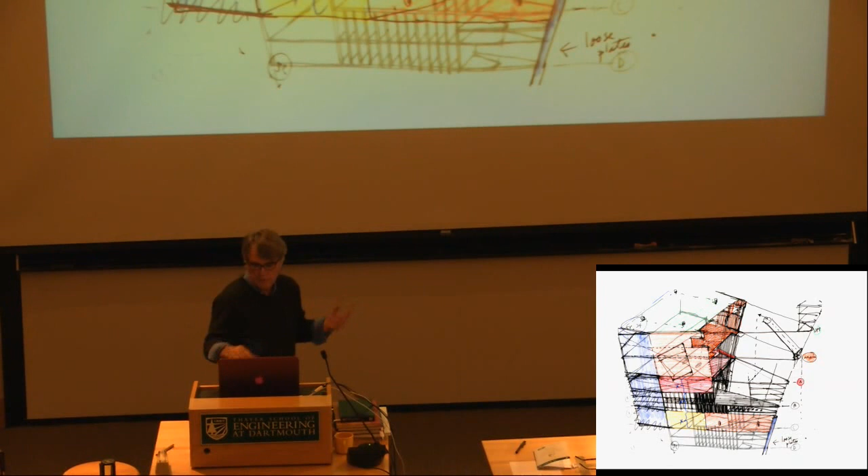So this little sequence here, drawing on the photographs—why not? Once you've got enough information in your head, you can begin to leave the photograph and start to figure out what the puzzle is, and it is a puzzle. I don't mind presenting it as a puzzle. In fact, one of the images may very well have all these pieces lying side by side, not necessarily in the order in which they'll be installed—although that would be counterintuitive to the organization actually used at the shipyard. They would have had things exactly in the right place.

But I think it's connecting people, younger readers often, to information that I want them to be excited about, at least in part, as much as possible, before they get the payoff of seeing a finished ship.

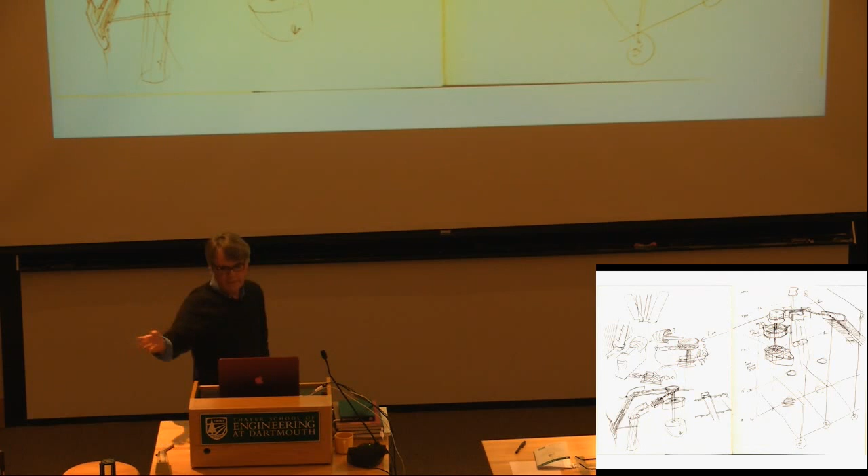Inside the anchor room, these things won't mean anything to you—they're all rust-covered and whatnot. But these tubes lead from an anchor locker, these big spaces inside the bow of the ship where the chains are dumped, then pulled out through this careful system and fastened to anchors hung from the side of the ship. You want them moved into these spaces in such a way as to not rip the surface of the hull or rip the paint off.

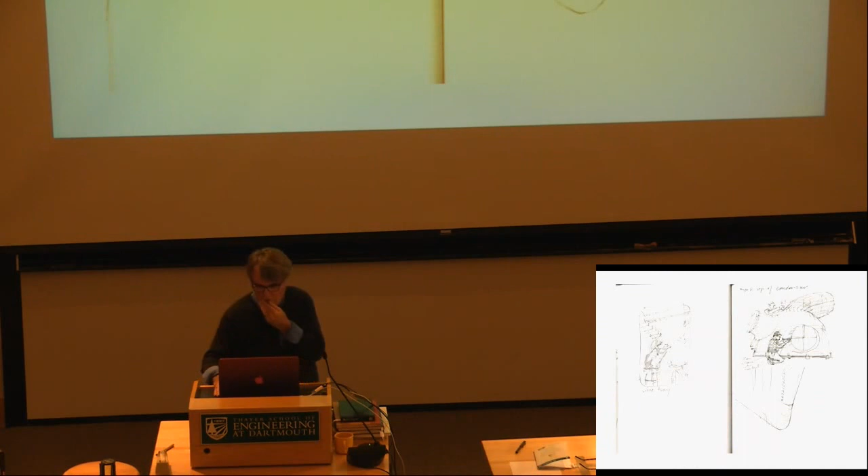So anyway, what else do I want to show you here? Oh, I guess I'll lead you to the big one. So what you've seen through all these sketches and bits and pieces is leading up to an image of the total ship.

In the book, there won't be an image of the total ship yet. You'll only know how pieces are built and how they go together, some having to do with moving the ship through water, others with maintaining structural integrity against the forces working against it as it plows through the North Atlantic. So I wanted some kind of concluding image.

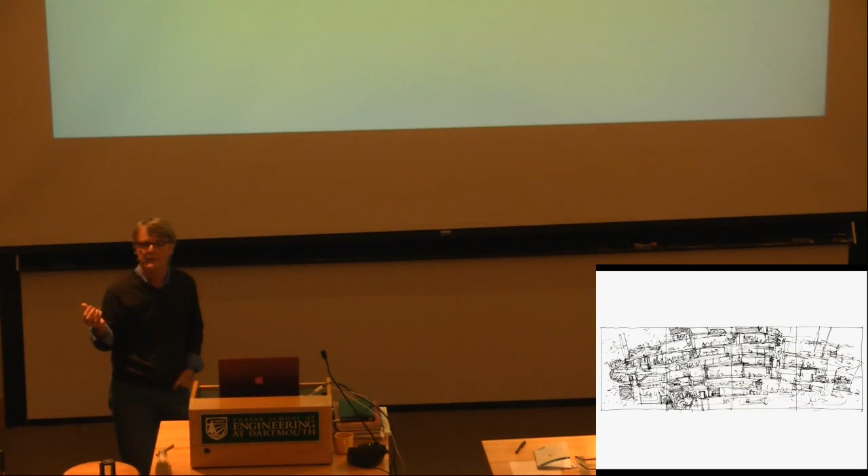You start with little things, little sketches. You think, okay, people seem to, especially certain kids, really love looking at cross-sections of things. You can do a straightforward cross-section and put little people in each of the rooms and so forth, and that may work. But I want something with some life to it, because this isn't a cross-section of a dead, static ship. This is a cross-section of a ship at sea when everything's going on.

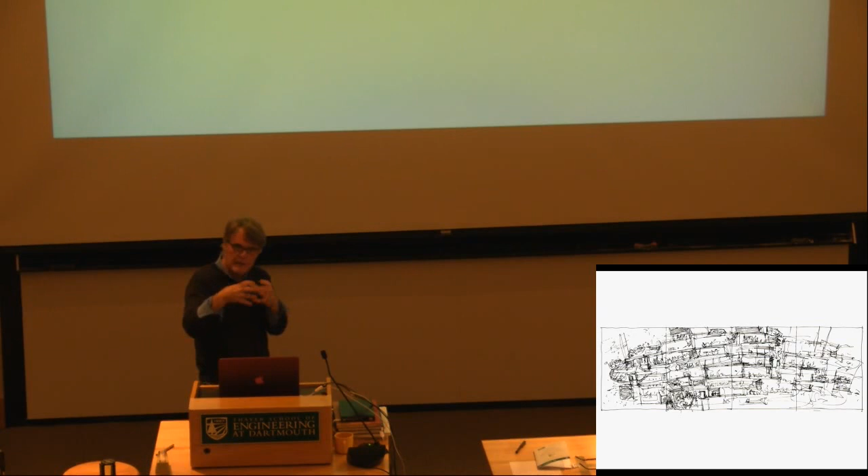So you decide through your sketches how far you can push the manipulation of this information so you don't lose the sense of organization of the ship's structure, but at the same time capture the vitality of this thing as an object connected to the lives of people, each with different responsibilities, needs, and so on.

I thought maybe just peel the wall off at one point. As you can see here, I literally take the steel and pull it away from the ship, revealing what's up against the outside. But I don't want to be limited just to the cabins and spaces that actually hit the outside of the ship.

These kinds of sketches are basically what I do all the time, constantly jumping from one point of view to another to see if I fully understand what it is I'm trying to say, what it is I'm trying to do. Do I understand the information?

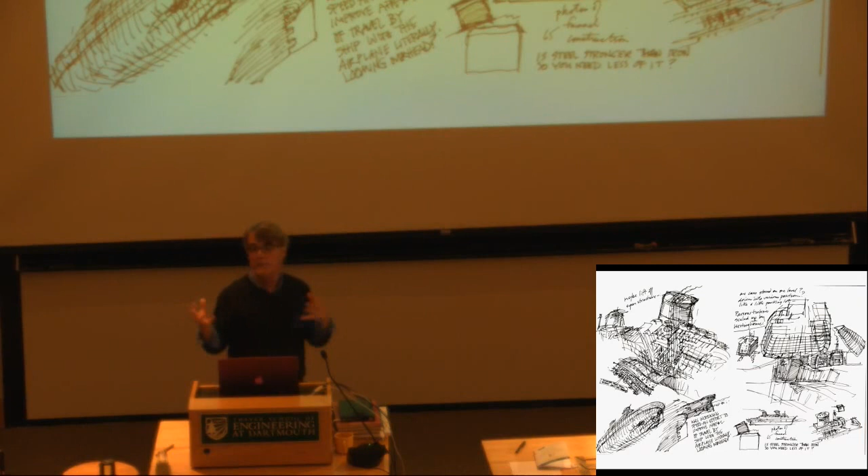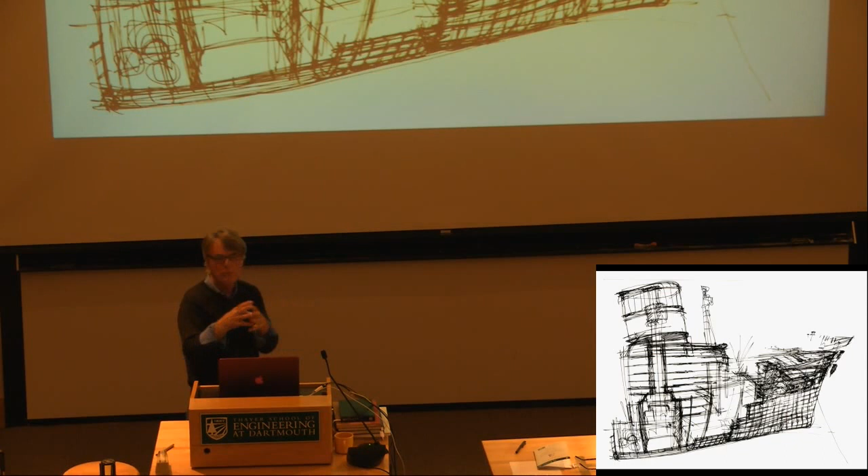So I think, okay, I've got the information. Let me take another shot at just the bow end of the ship. I start with that, and it's too short, looks like it's been scrunched up against the pier. So I cut it up and Xerox it, cut it up, paste it down, use it as the skeleton of a larger drawing, the next drawing, where I'm really trying to make sure I have the right number of decks now. What happens as you do these drawings over and over again is you start to get a little sloppy, so every once in a while you have to stop yourself.

But that's the great thing. These are, for the most part, starting to get to be larger drawings, but most of the drawings I've shown you, and the drawings on which these are based, tend to be really small, quickly drawn, and dispensable.

So it grows and it grows and it grows, and eventually you get to something like this where you can begin to reveal the internal structure of the ship. You begin to suggest the activities. Some of the cabins and rooms on the outside are shown. The hospital will be shown, the morgue will be shown, the two refrigeration units, one labeled eastbound meat, the other westbound meat.

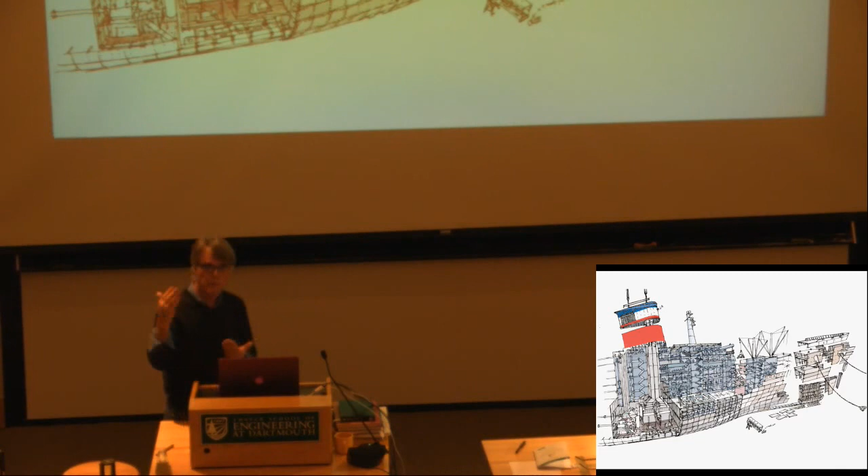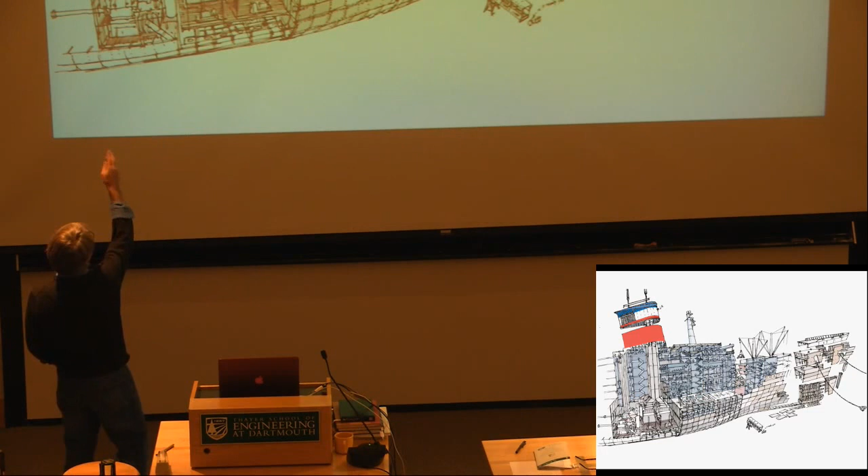We were in a cabin directly over westbound meat, which I thought was incredibly appropriate — not that I knew it at the time, but having read that. And then, of course, the engine rooms, the boiler room particularly, all the way up through the funnel, the engine room right behind it, and the propeller shafts right behind that.

All this is to finally get me to this kind of an image, which, even though it's really rough and sketchy, will have enough life to it, I hope, enough useful distortion to engage the reader and make it look like less of a diagram. But it has to have diagrammatic qualities.

I think when you're drawing, you probably feel that much of the reason for even bothering to pick up that pencil, as you're having this conversation with somebody or just sitting by yourself trying to work something out, is to diagram the information in a way that makes sense to you.

Okay, so the payoff. This is a dummy of the book, which will have the story in it, of course, like 64 pages worth of story with the various aspects of the ship — power, structure, life on board, and so on. But what I wanted was to create a book that...

Let me see if I can do this. The whole point is when you get to the end of this thing... we should do that.

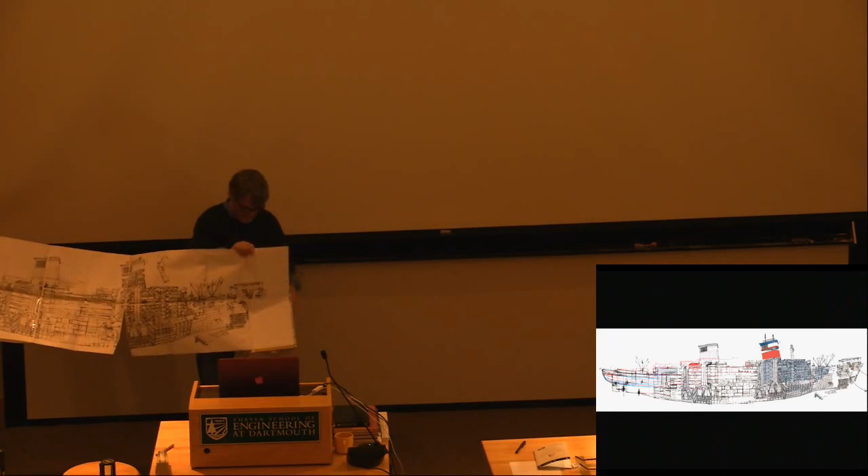So much of this information could be conveyed through the computer, could be conveyed digitally. Those of us still in the old world of bookmaking have got to find ways that aren't gimmicky, but that allow the reader, the user, to do something that the computer can't do. So anyway, that's the tactile part of this.

Now, I was thinking that you're working from ideas, working with projects that have to do with mobility and portability, and I couldn't really anticipate what those things were going to be. I saw that somebody has suggested ski boots that don't make you feel like such a klutz when you're walking around between skiing sessions - not so much of the plod thing. So I don't know what you do.

It's an interesting problem. I began to wonder, well, what is the issue here? Is it the fact that these things don't move the way your foot does? There's no aspect of this thing. Do you create something inside this solid, unchangeable boot that actually feels like a normal shoe under normal circumstances? Is that possible without this thing becoming even larger?

Do you decide to articulate a ski boot? Is it possible? I don't ski, so I have really no clue what I'm talking about. But is there any articulation of a ski boot? Or is it primarily meant to be static, structurally solid, unmoving, inflexible? I don't know, but those are the kinds of questions I would be asking if I was drawn into a project like this.